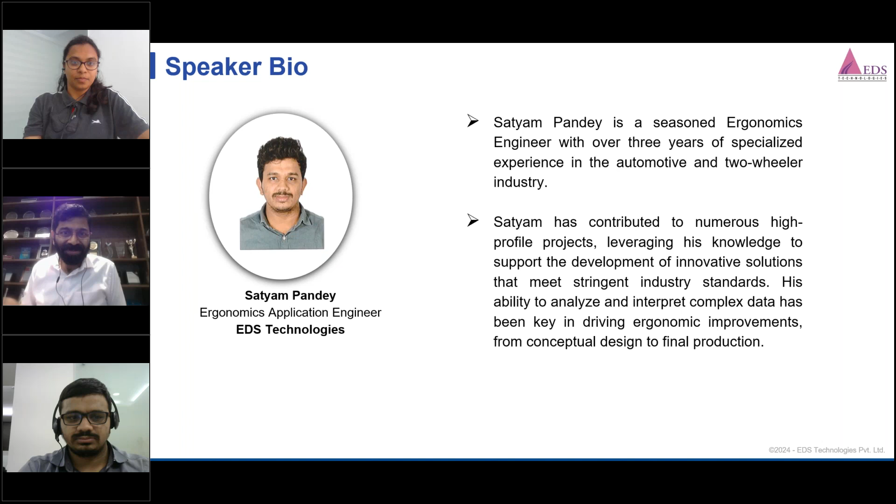Hello, good afternoon everyone, I'm Manasa. I've been with TVS Motors for the past 4.5 years. I started working as a designer for 2 years, and then moved into this role for the past few years. I took the entire responsibility of simulation engineering at TVS Motors with the help of RAMSIS software.

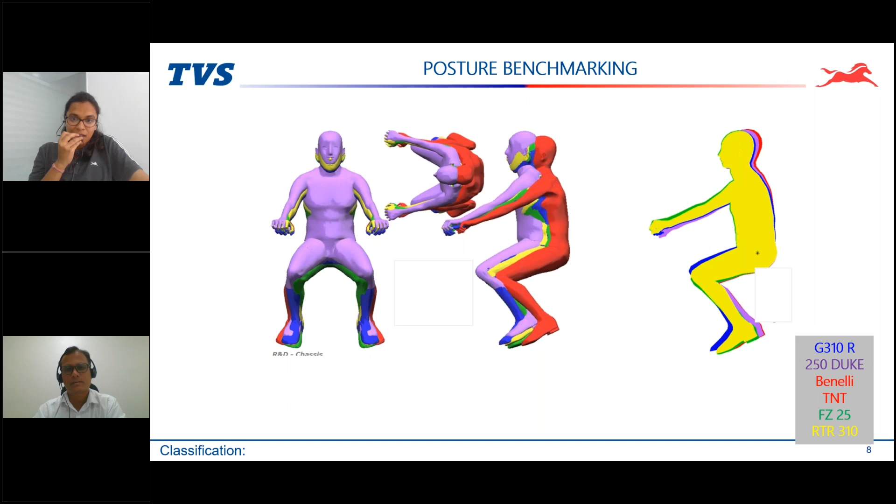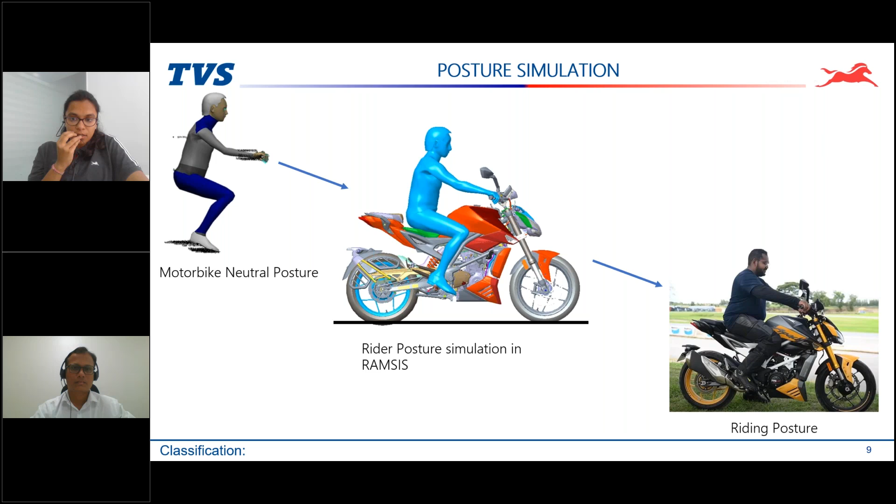This could be the most generic procedure for any posture simulation that we follow. Apart from normal neutral sitting postures a rider can perceive, there are other interactions when he or she is using the vehicle that are captured through RAMSIS, so discomfort can be avoided at a very virtual stage.

Here are some examples where interaction with passengers and the vehicle is important. Ingress and egress along with rider interaction is crucial for current market trends because of the use of pannier boxes, increasing need for long touring rides, and ease of accessing each touch point such as seat lock accessibility. We use RAMSIS in these situations to understand how the rider and pillion interact with the vehicle so minimal redesign can be done in physical stages.

As you can see on the extreme right side, we make sure that the rider and the pillion have a comfortable seating posture, virtually simulated using RAMSIS.

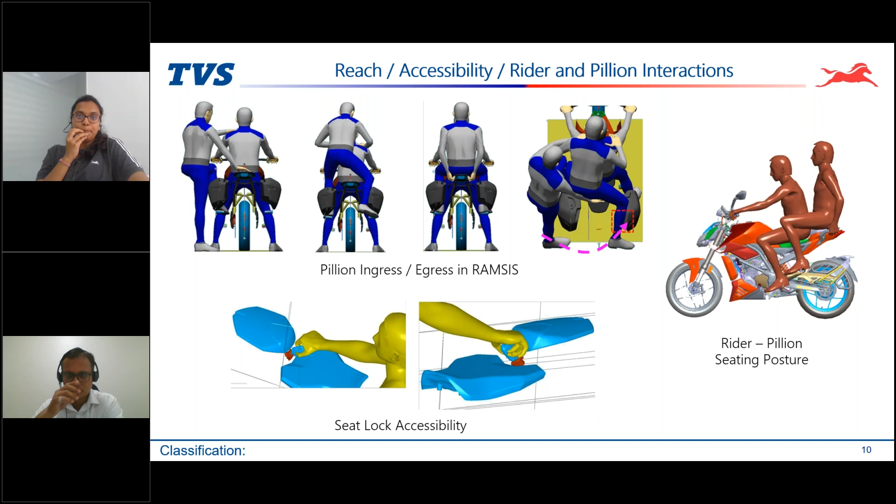On an overall scale, using virtual simulation softwares, we are able to perceive a very close reality to what we can achieve in the vehicle in physical stages, but at a very primitive stage. This can help us by giving very fast iterations along with an efficient design. We can go for a reduced number of prototypes instead of relying on each and every part for the prototype of the vehicle to come by, and consequently the cost and time would be saved. This is how TVS is trying to use RAMSIS for ergonomic simulations.

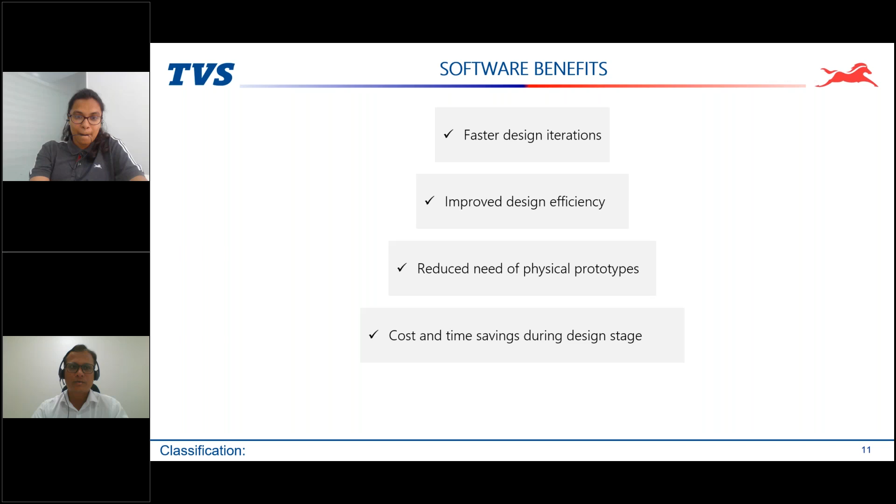Thank you, Manasa, for your time and a very good presentation on how RAMSIS is benefiting TVS Motors. From here onwards, we will start our technical presentation, the main content of today's webinar.

Here is a list of the content we'll go through. We'll start with RAMSIS for automotive in general, how RAMSIS is used in the two-wheeler industry, then see some typical analyses in RAMSIS like direct vision, reachability, mirror vision, and force analysis. This will be followed by a RAMSIS application demonstration, and lastly a Q&A session for whoever joined this webinar. So we'll start up front here.

We will see how RAMSIS evolved and the history behind it. Up until 1960, in very primitive days, there were two-dimensional scenarios and drawings. Mainly, vehicle ergonomics was taken care of by the SAE standards. These standards were important, and gave some guidelines for ergonomic assessments, but they were two-dimensional, and mostly based on American data from 1960, applied the same for everyone. But we know that anthropometry changes continent by continent, nation by nation.

Around 1990 and early 2000s, with the advent of many new three-dimensional CAD applications like IDEAS, CATIA, NX, and Creo, there was a global need felt to have ergonomics also done in three-dimensional way, and thereby RAMSIS evolved. The ergonomic quality of cars started drastically improving after that, with the advent of RAMSIS after 1990 or 2000. So it is definitely benefiting the overall ergonomic quality of cars.

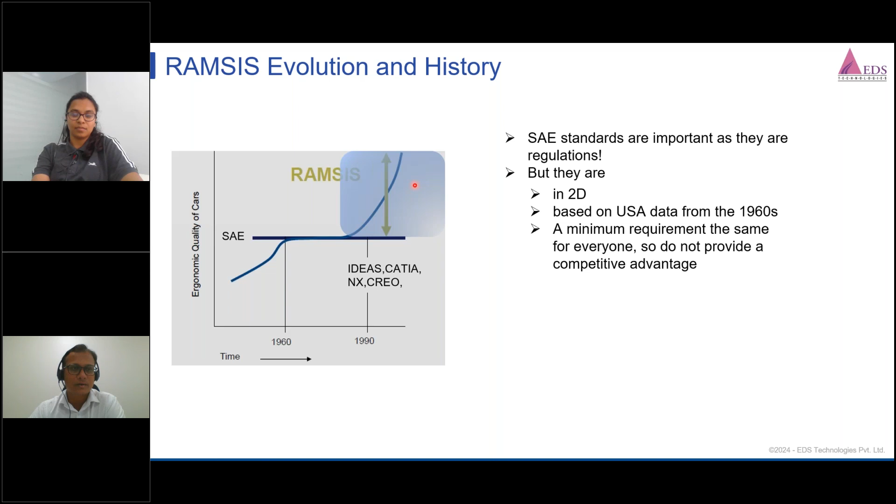So what is RAMSIS basically? If we abbreviate RAMSIS, it stands for Realistic Anthropometric Mathematical System of Interior Comfort Simulation. It's the most comprehensive ergonomic simulation software in the design of vehicles and aircraft.

It has a realistic representation of human beings available very early in the development process, so you don't wait for physical prototyping. This can shorten development cycles, save development cost and effort, and provide early evaluation of bike and driver appearances. It can also increase product quality and overall customer satisfaction, and it's a leading ergonomic simulation software worldwide, used by more than 70% of OEMs globally.

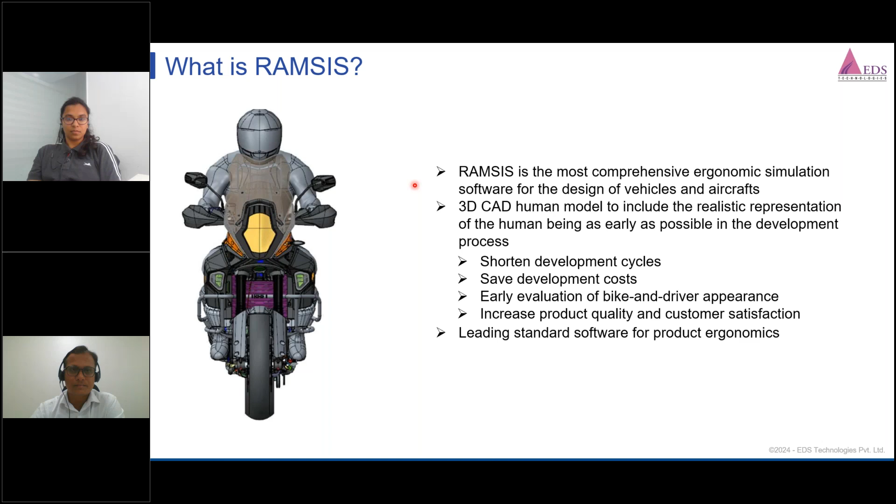So you can choose any future database for your future cars and programs. Apart from these available databases, we can also achieve custom-made body sizes and body proportions with the help of the RAMSIS Body Builder module, available in RAMSIS. RAMSIS mannequins have a realistic and credible appearance, scanned to very high accuracies against realistic populations.

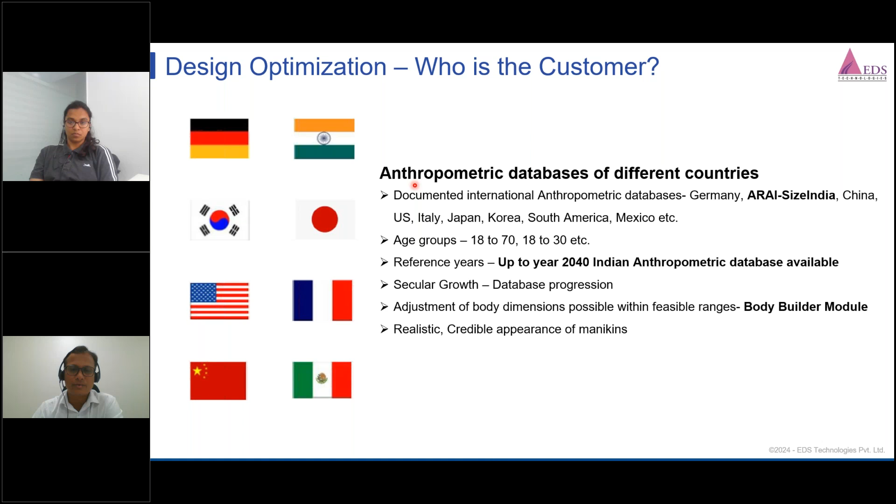So apart from the driver and the databases, you can choose how many drivers you want to declare and study in your vehicle context, and how many pillions and riders you want to study. You can literally choose as many as you want and make the vehicle geometries and controls suitable to those selected driver populations.

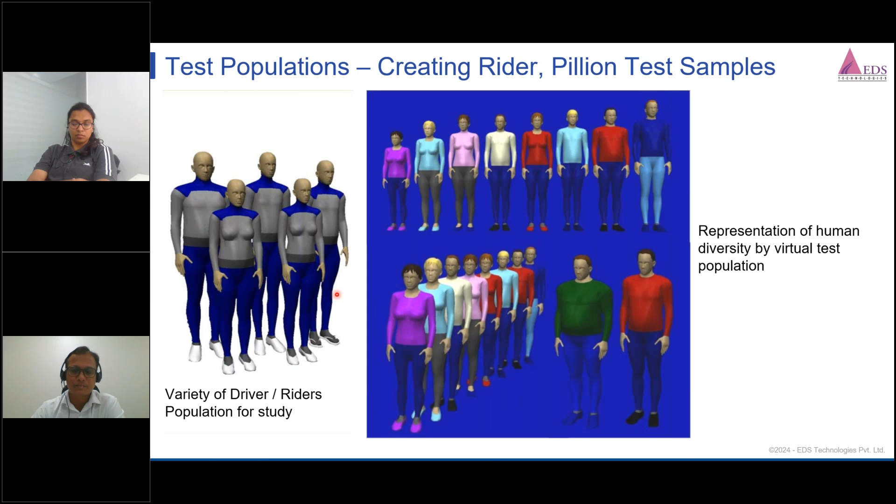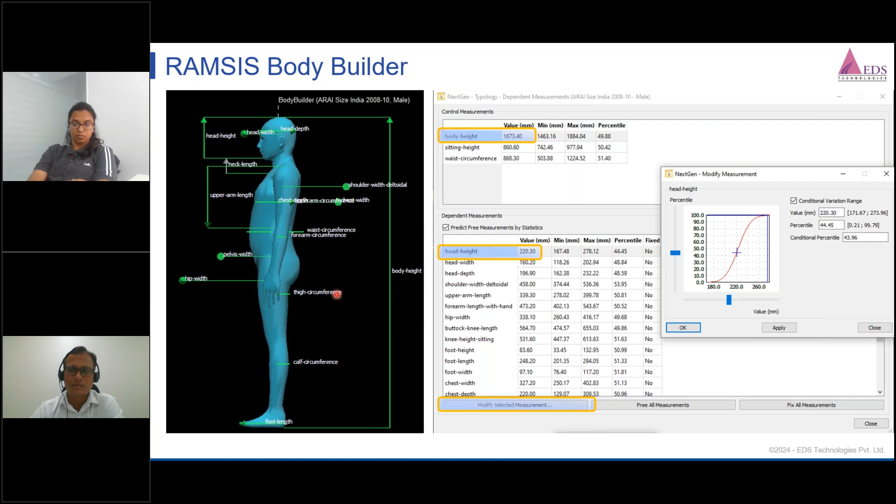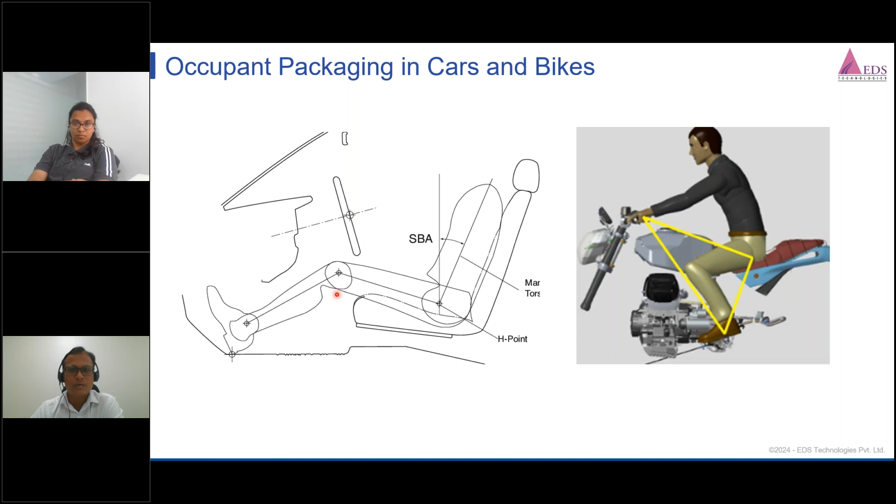So first we have to start by defining the markets, choosing the anthropometric databases correctly, and choosing the posture models. For defining the target, as I said, we have all continents and all demographics data available built inside. We have different age groups, reference years, reference progressions, and we can choose from size, corpulence, adjustments, and proportions. Apart from that, we have the RAMSIS posture model, which is a distinguishing feature of RAMSIS, providing ready to use posture models for different industries.

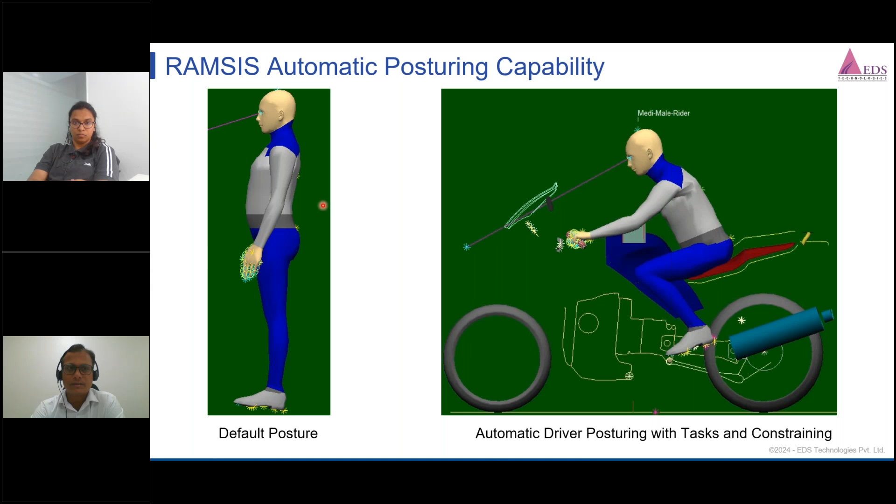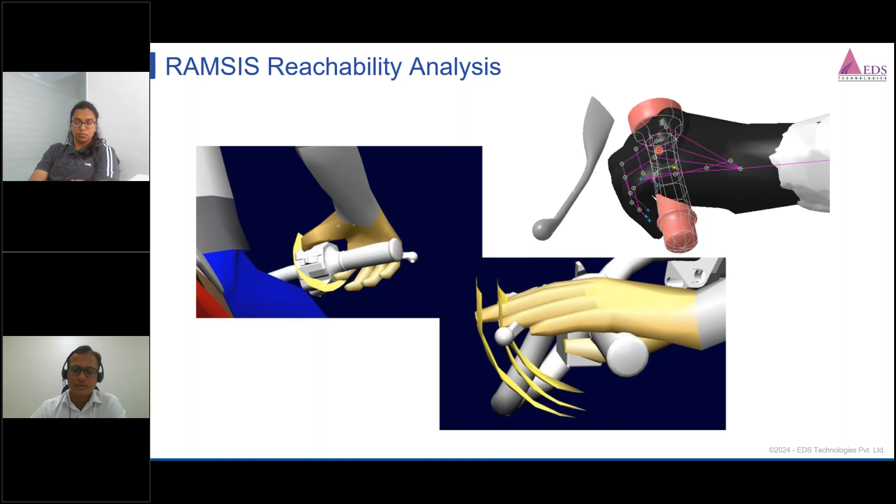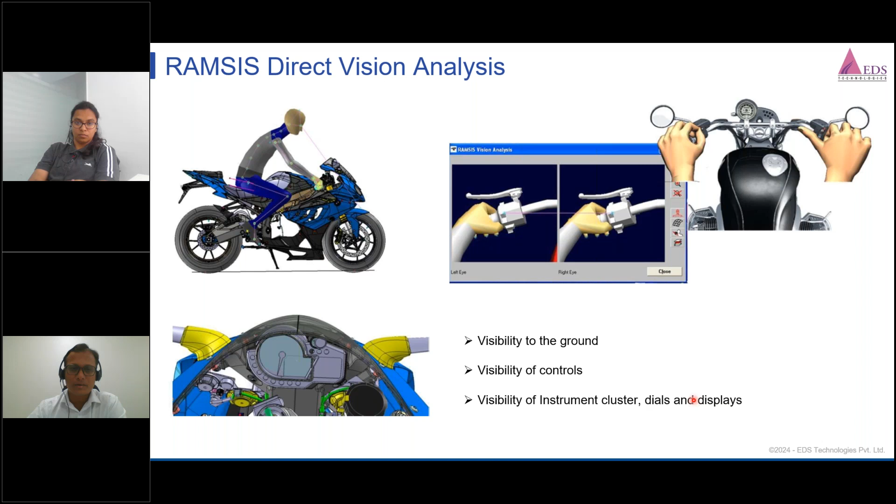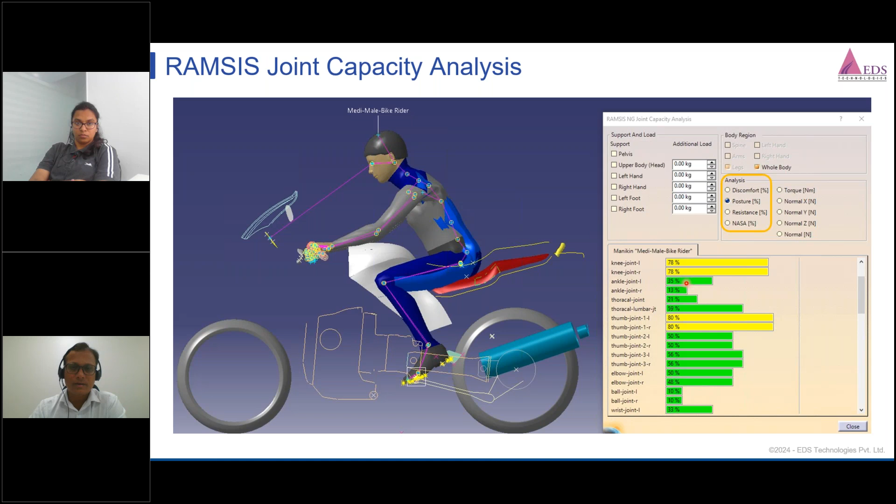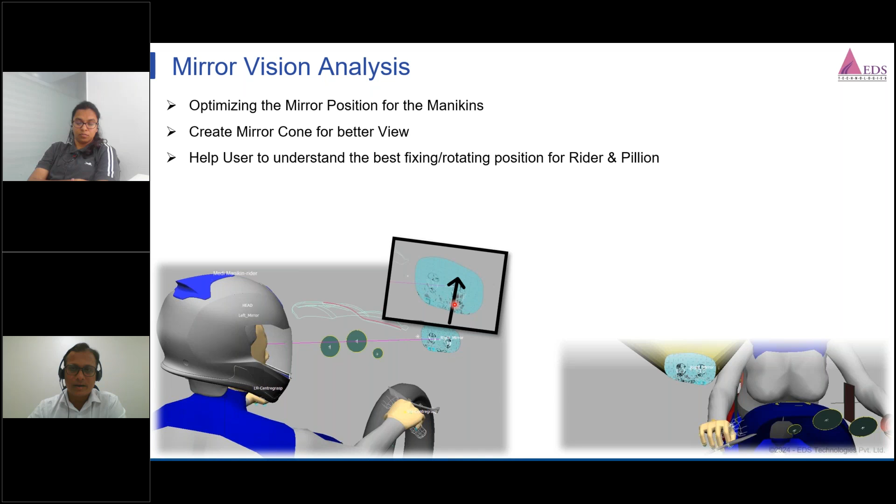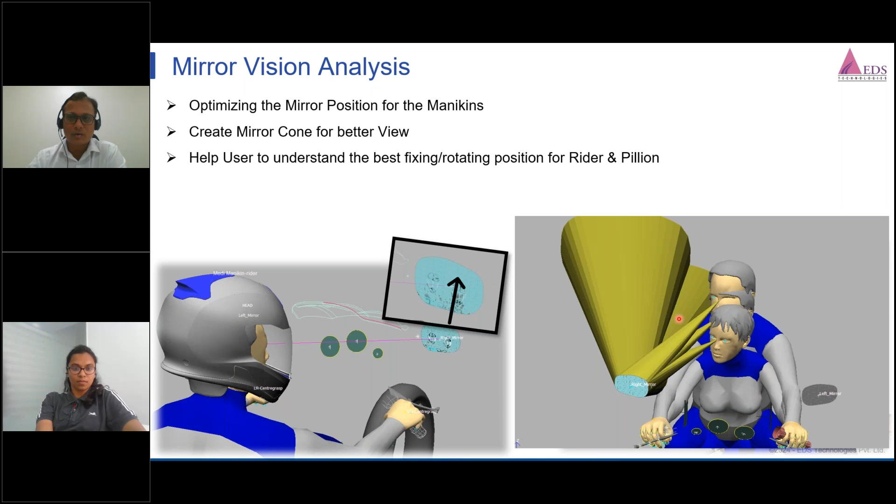And these are the mirror cones that the smallest woman is able to see. So these are the typical cones that can be exported out of RAMSIS and taken to the native CAD applications for the assessments. Not only the smallest woman, but all the population inside the seated position, three mannequins now. So all this can be taken out, and you can see what is the rear view vision for all these three populated mannequins.

And that is a very good value to know very early in the design, so that if the force values are too high or too low, we can make design corrections in our controls design, or maybe in the clutch geometry, or maybe we can increase the leverages, thereby reducing the forces. All those assessments we can do quite easily here.

So it gives three levels of forces, like maximum force, which the mannequin uses sometimes, like pressing the kick lever, which we don't really use now, but that is a one-time activity. So it needs maximum force, and it can give you that force as well. Tolerable force is for intermittent actions or controls he operates in the seated position, how much force will be required for that operation. So that tolerable amount of force can also be known.

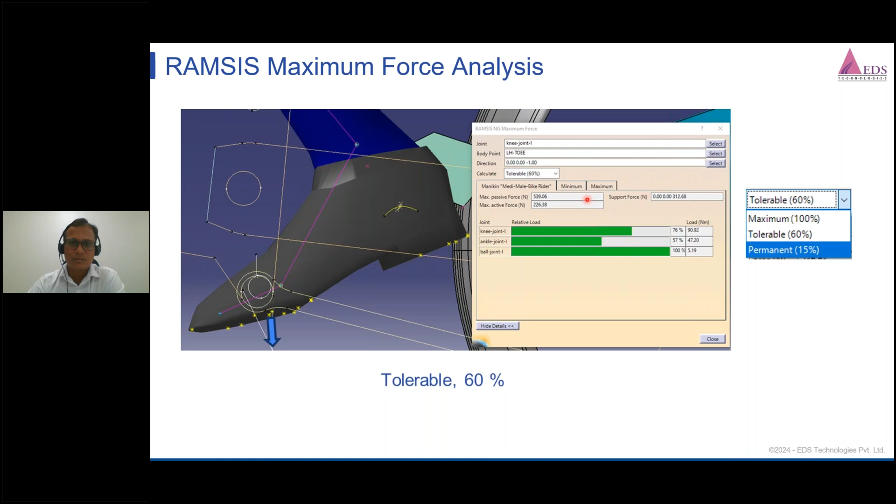And permanent force is something like holding this handlebar or holding the steering wheel. So handle and steering wheel are also among the important controls. So for holding them, how much force will be needed, because we hold the steering wheel and handles all the time. So we have to estimate, or we should know, what force is really required for that. So even that force is available to know from here. So from this, you can really know these force values also.

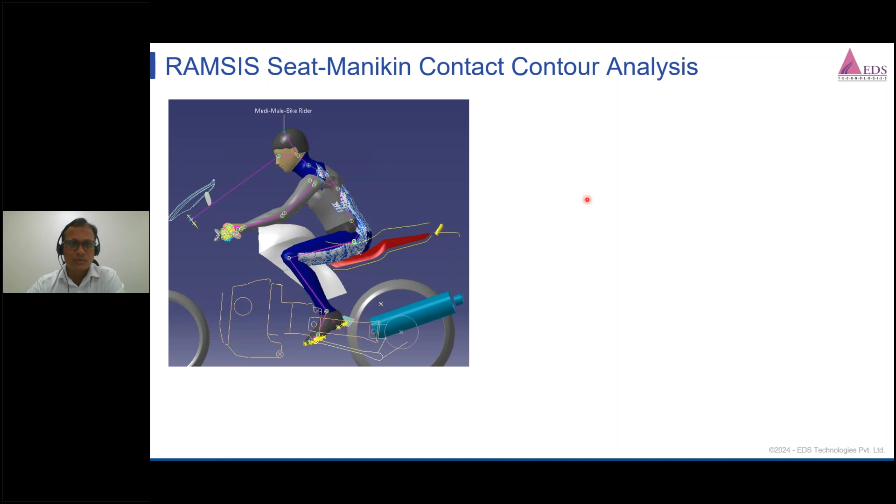One of the mannequins is made to sit on the seat location. He has occupied the position, he has occupied himself in the seating geometry here, and then we can literally extract his body contour out and further make use of it. So I will just show you. So this is a typical contour of the seated mannequin that can be exported out of RAMSIS. So if we just see, this is the typical contour.

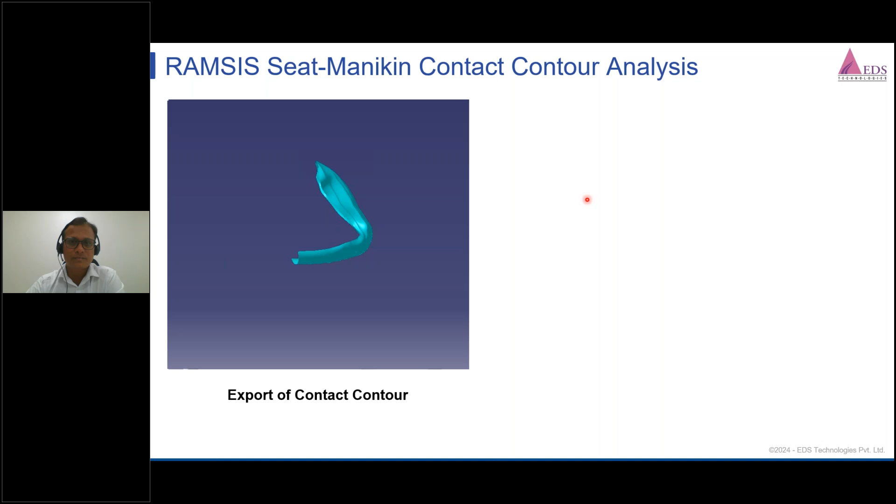Now, if we export this contour out of RAMSIS, we can place it in our native CAD applications, and we can study how far it has an intrusion with the seat, and whether it is going too close to the metal geometries, pipings and tubing, etc. beneath. That also can be known, or many other assessments can be done out of it.

If any OEM decides to provide a different type of stiffness at the rear and the front, even those can be decided, deciding the length of the less stiff area and the more stiff area. That also can be one of the studies that can be done with the help of this contact contour. And its geometrical output can be derived, so that's a good part of it.

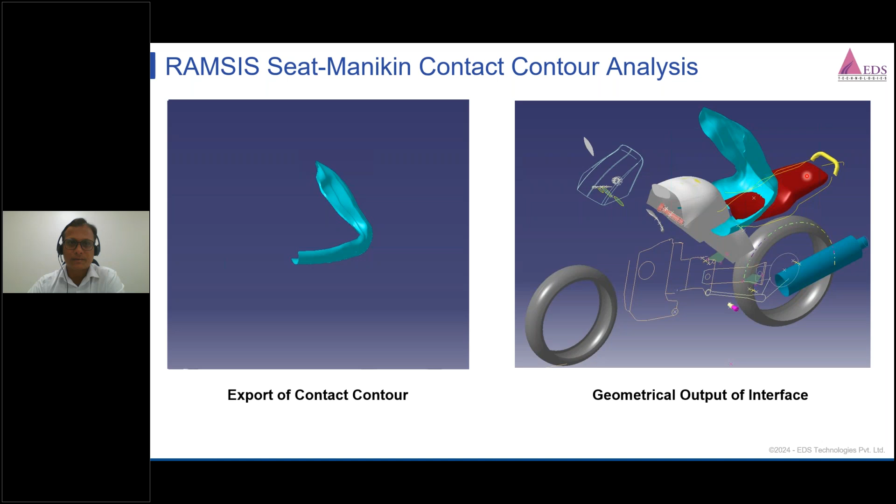Ground reachability is another tedious topic, especially in the biking industry, where the saddle height is of really great importance. It tells a lot about whether the shortest person can reach the ground comfortably or not. This is especially crucial because in traffic scenarios and tight city conditions, we have to have this ensured, because a too high saddle position will really make the short person uncomfortable to properly

So we can study these scenarios in RAMSIS. Otherwise, we need actual human test populations of those sizes, and then we can only have those studies quite late in the program when we have actual prototypes done. And there is very little chance of any design rectifications, because by that time a lot of prototyping, soft tooling and tool ordering has been started. So any change takes a lot of cost, time, and effort.

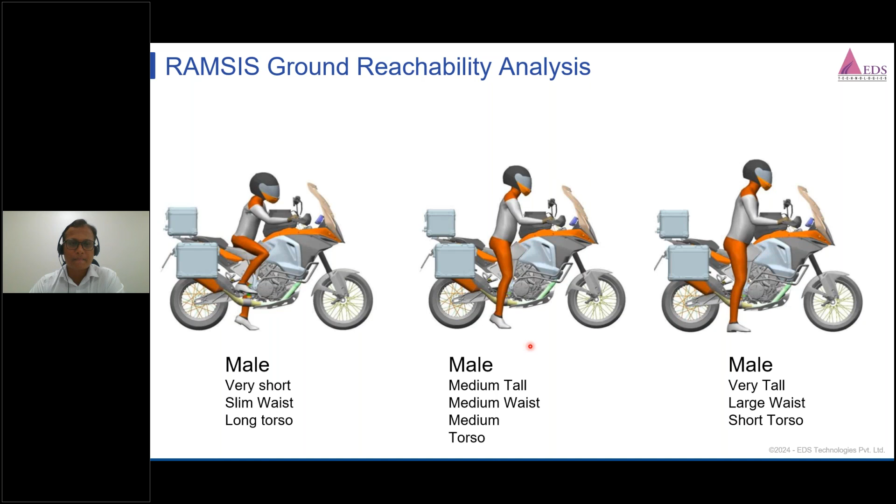How can RAMSIS benefit you for the product design? It can also give you some hints about how we can improve our design conditions. So the color graph here is not any stress condition, like stress features or stress values, but it represents three types of mannequins, just colored with different colors for the sake of understanding. With these three populations, you can place them in the seated position and study the vehicle interfaces that have direct contact with the body dimensions or body proportions.

So any physical contact with the vehicle geometry is actually a kind of vibration path towards the mannequin. Thereby, the mechanical vibrations travel to the mannequin and make them irritable and uncomfortable, so that he can't drive for a longer time. So such contact should be known very early to the ergonomics engineer, so that the vehicle geometries can be properly optimized, and such unwanted scenarios do not come very late in the vehicle launch programs.

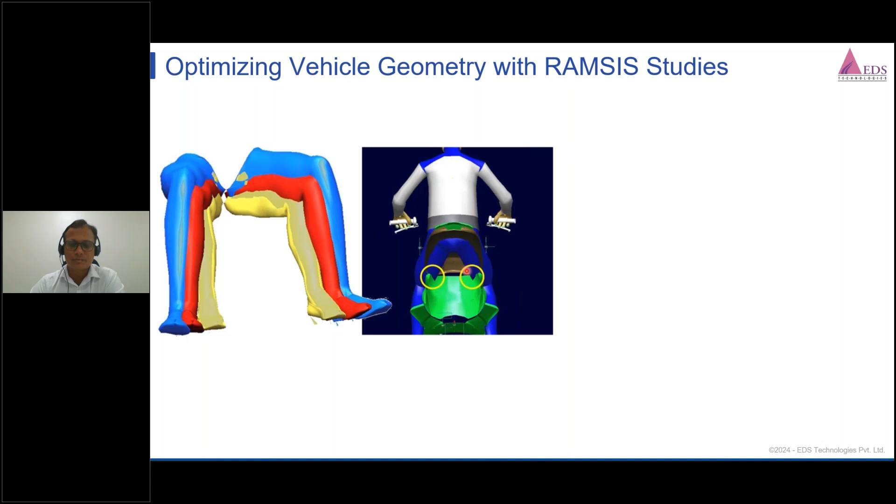Another scenario is the transmission casing. This can't be known unless we position the digital mannequins or the physical mannequins. But the digital way gives a good chance to know such interferences, which may otherwise be a hard contact between the vehicle geometry and the human. Then the design condition here will be to give some design changes, or shifting the position or something. Those judgments and decisions can be very confidently made out of these studies.

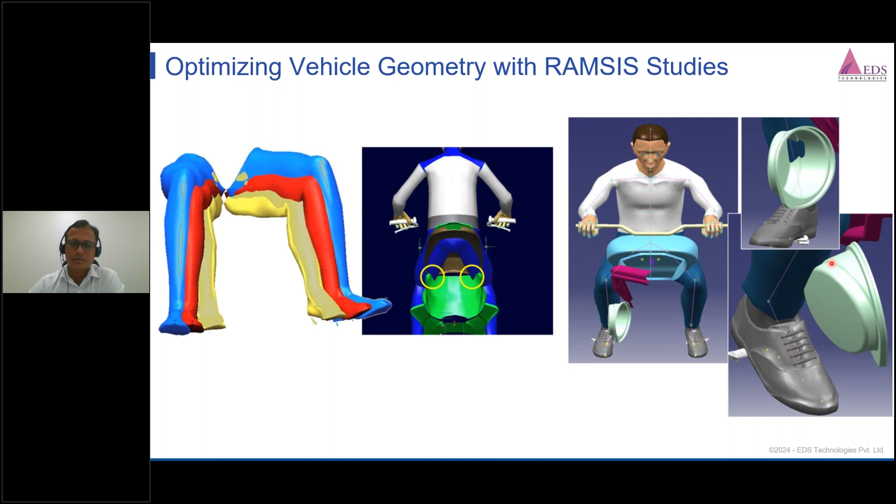Another good topic is that in the biking industry, we always ride with different add-ons, clothes and apparels, trousers, etc. So RAMSIS provides the possibility to have those add-ons on top of the digital mannequins and study the different activities with those add-ons on the mannequin. For example, the first mannequin I have chosen is wearing a jacket, so street wear, with boots and trousers. And then I will make certain studies.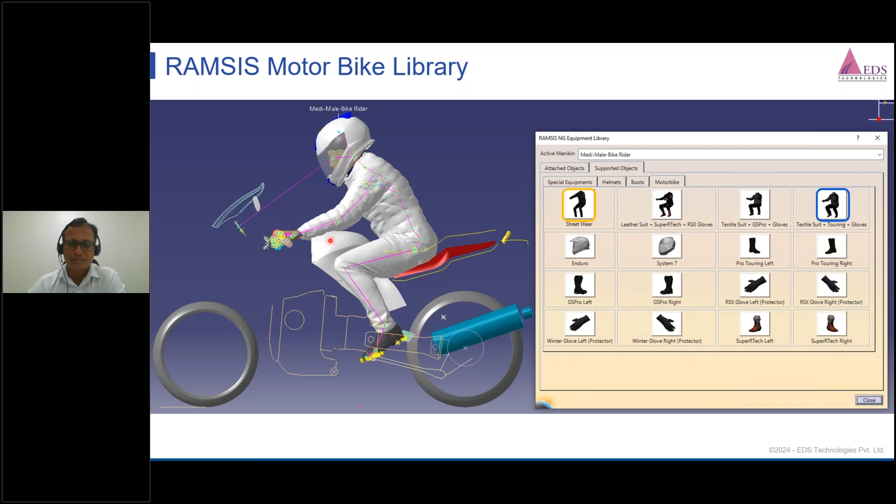But if I have to make another kind of add-on, like a textile suit and touring and gloves, with just a click of a button I can change the mannequin to the desired apparels. Then the mannequins take those apparels and add-ons, and we can do our studies accordingly.

What will happen if I make the clutch or the footrest position slightly forward, slightly backward, slightly up or slightly down? What will be the delta effect of all these changes? We can study it right in RAMSIS by knowing the joint capacity, what we saw in the previous slides, and choose the most optimum ergonomic triangle for our use that will eventually be comfortable for those test populations.

For example, the Indian mannequins or Indian population. So this is very crucial in the studies, because here we saw a lot of problems where there are some concerns that either the footrest is quite low or quite high, or the handle position is quite forward or quite backward or quite high in the position.

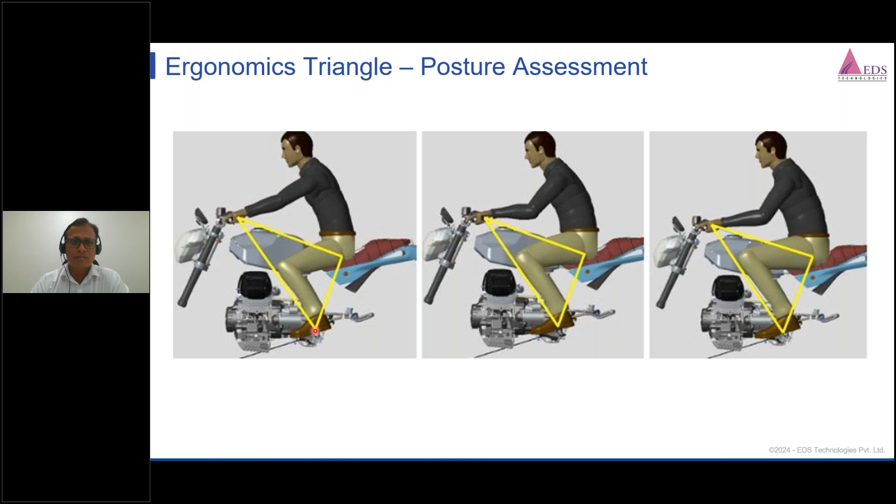I think with that, that was possibly the last slide from my side. I think we have one more, yeah. So the condition here is that with the footrest, we can try different iterations, like this is slightly inboard, this is slightly outboard, and we can study both conditions and see how comfortable the posture is at this position. So all these delta studies can be done; this is a typical ergonomic study that we can do.

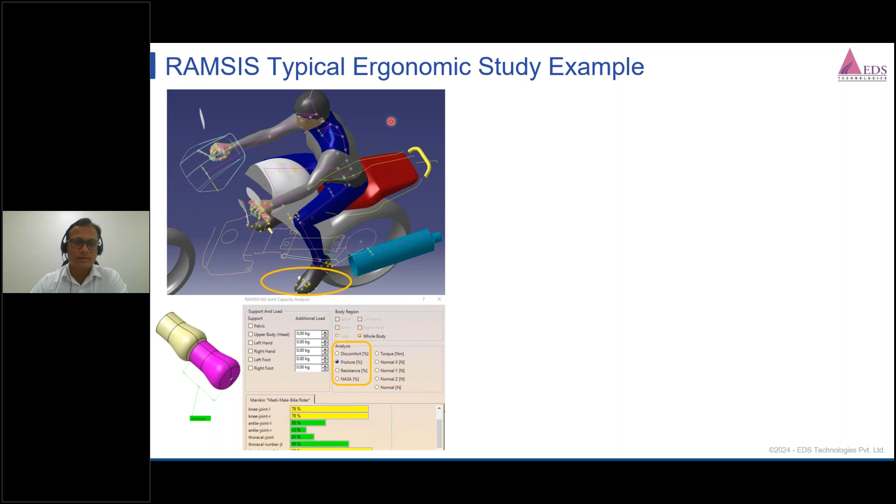Again, the force analysis: what I see here, you can readily see the force values that can typically be applied at the ball of foot level here. So these give ready-made force values that the mannequin can exert at this point of location. I think that was it.

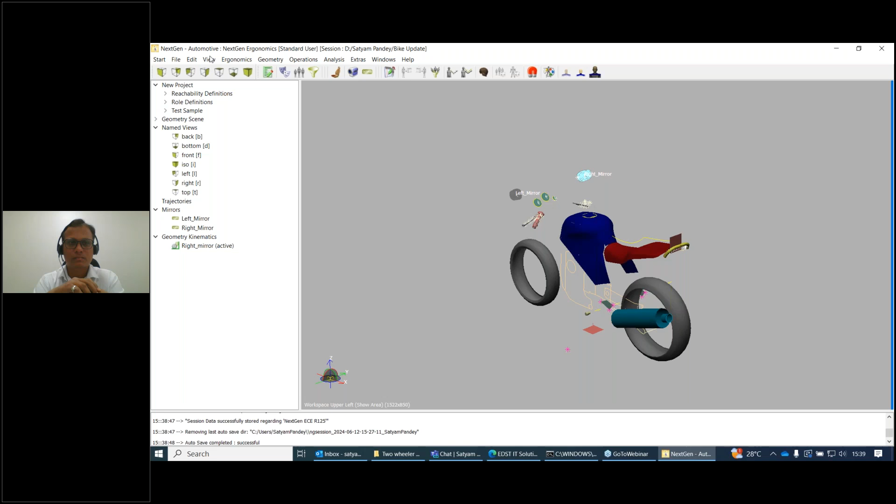So I'll just quickly go to the applications. So we have RAMSIS NextGen in standalone. For example, we have here a 3D two-wheeler geometry of the bike, and this is what the typical UI of RAMSIS NextGen looks like. At the start we have different aspects like ergonomics, project managers and bodybuilders, where we do different analyses. How to create the mannequin and how to iterate the process is what I'm going to showcase in these small demonstrations.

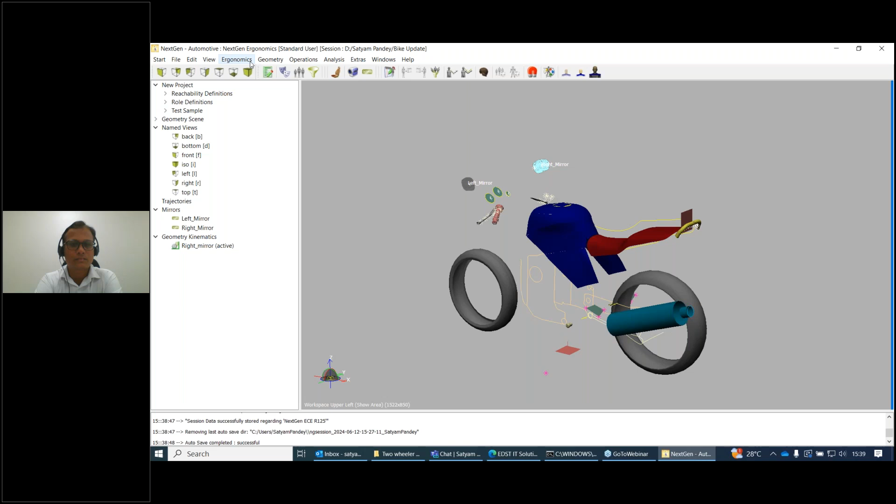So first, if somebody wants to create populations or test sample filters, we have something called the project manager, where we define the role definitions and the naming, for example, rider or pillion. Then we define the range of motion; different ranges of motion lead to different movements of the body. Then we have different H-points. Typically we select the average H-points, where we select the mannequin's neutral posture and average sitting position.

And then we have different adjustments. We have the age-dependent vision. In the slide you have seen that we have age groups. So if you are creating an age group or an old mannequin, you can change the age-dependent vision, which gives a more realistic scenario of how the mannequin's vision is affected with respect to age.

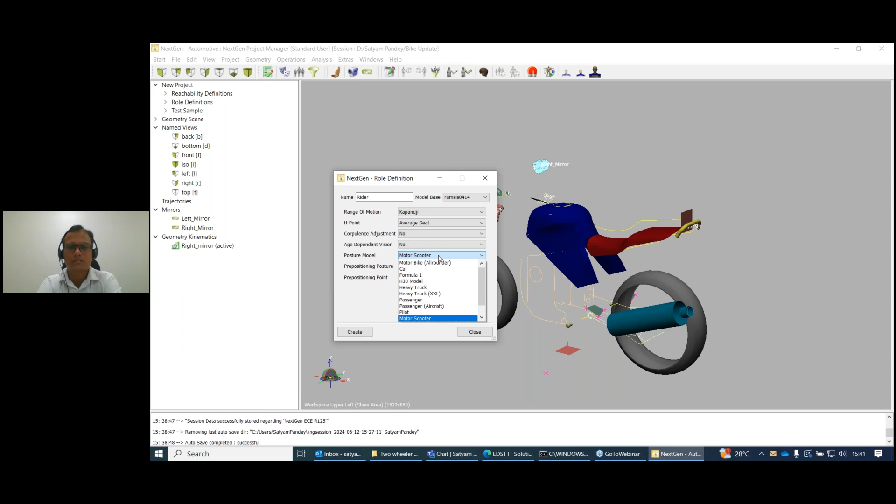And for the posture models, for the bike we have the motorbike all-rounder, and we have the motor scooter models. We select these in order to validate the ergonomic studies for the rider or for the pillion. Then we select the pre-positioning points for the simulations; for example, the pre-positioning point would be your H-point, or sometimes a G hip center. You define that point, then click on create, and it will be created.

So for example, you can see here the role definitions. I have one for pillion and one for rider. Once you have created the role definitions, you can create the mannequin. In the role definitions you are basically defining what exactly you are going to create, for example, whether you are creating for the rider or for the pillion.

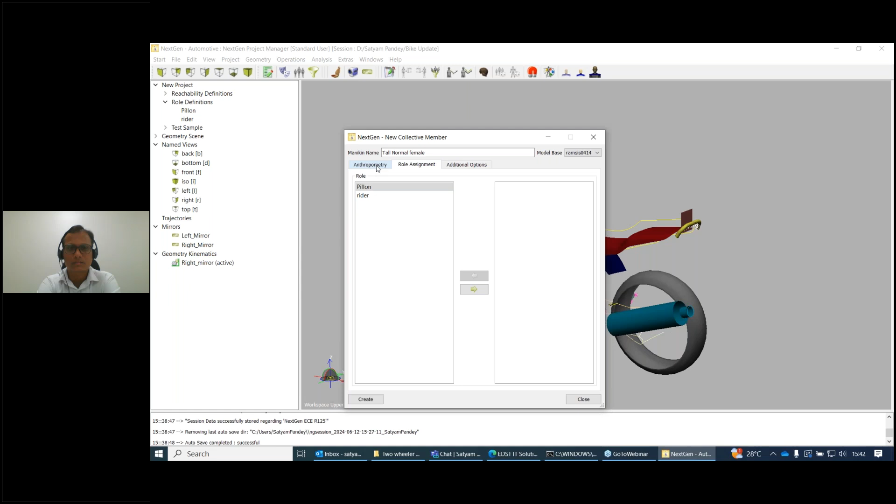So you can see here we have both riders and pillions. And then here, for example, if I want to create a small mannequin or medium mannequin, I can go for the sizes which are available here. You can see the populations, you can see the age groups. I can select any of these, and the nation data, which nation data I have to select. So for India, we have two data sets: India and India ARAI size.

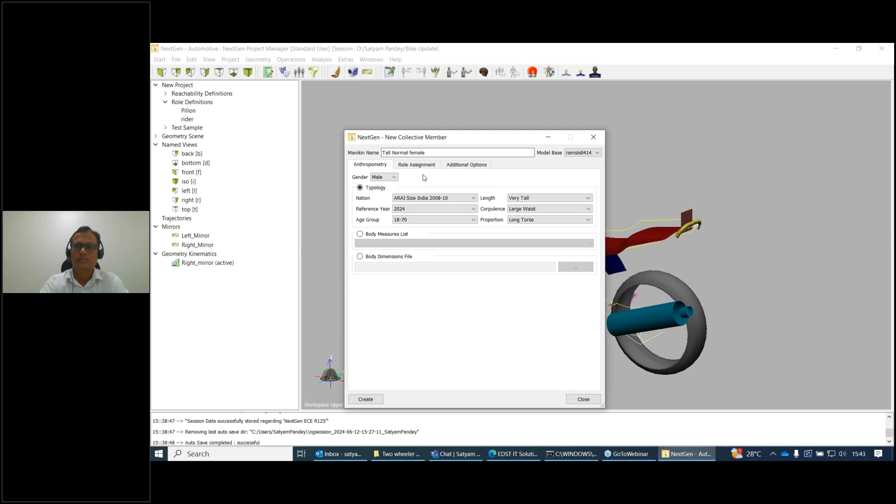And we can also select the gender you want, male, female, or child, if you want to perform those studies. And on top of that, you can also select the body measurements. Now suppose you have taken some actual person data, then you can import it inside RAMSIS by using the PML. And then you can click on create, and the mannequin will be created.

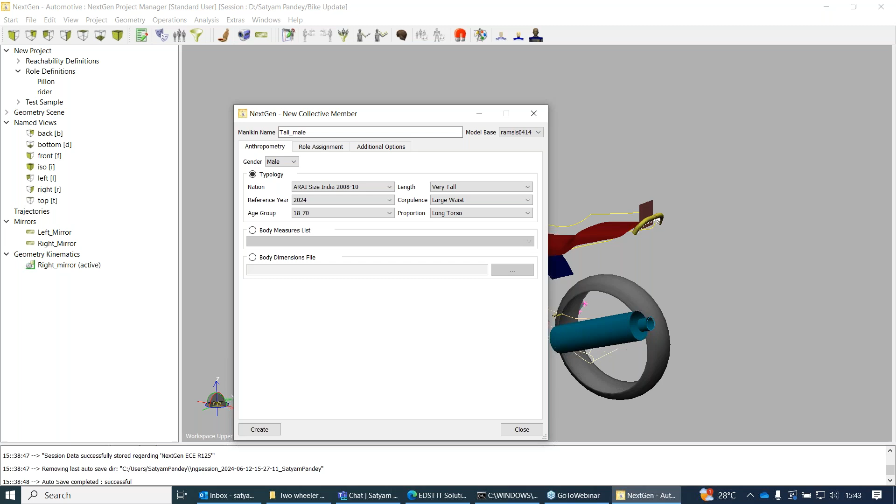For example, I'll create one mannequin instantly, so I can show you how exactly it looks here. I'll create one tall male. So basically, your short male will be a 5th percentile, medium male will be a 50th percentile, and tall male will be a 95th percentile. So, male. I select the reference year, for example, 2024, and I'll just create tall male. So you can see this mannequin has been created here, along with the textures, along with the shoes.

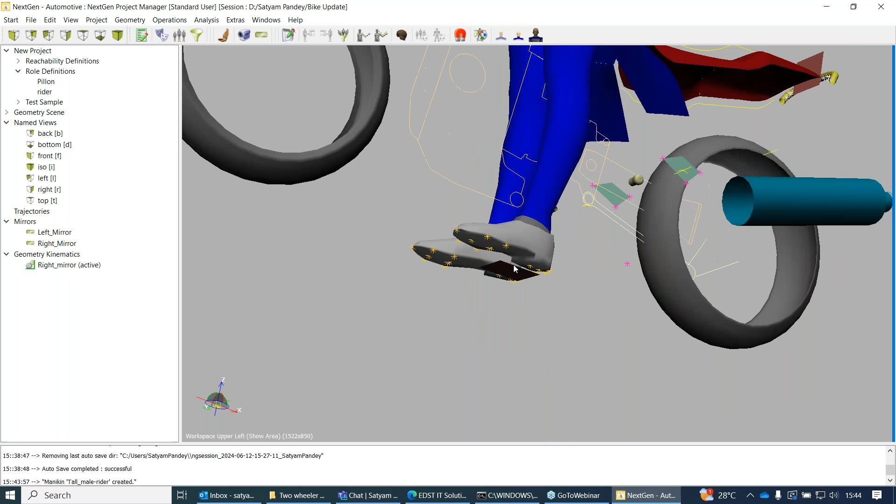Now we definitely have to add the constraints. Before we add the constraints, we have something called skin points here. You can see some of the skin points added already. And if you want, you can create skin points anywhere on the body in order to perform any kind of study. Once you've created the skin points, we have something called ergonomics, and inside that we have operations. Inside the operations we have define restrictions, where you start defining the restriction with respect to the environment object and the mannequin components, that is the points.

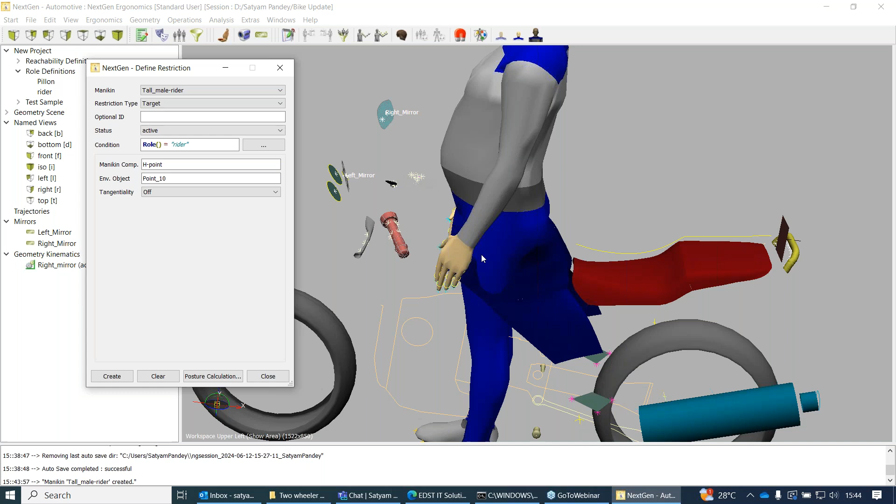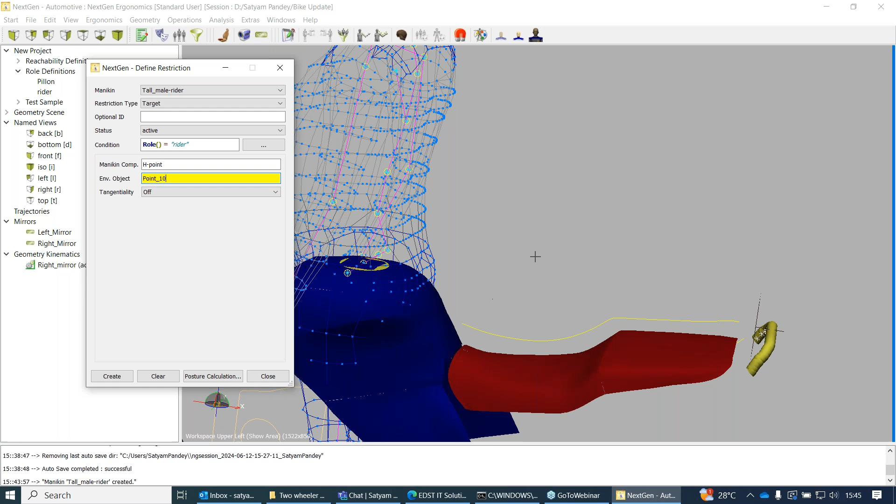For example, I can select the mannequin H-points, and then I can place them on the seat. Here I'll select the point which I've already created, and then I can simply click create, and the restriction will be created for the mannequin. You can see the restriction has been created, and if I want to see these restrictions, I can see them in the restrictions overview. You can also see this mapping has been created.

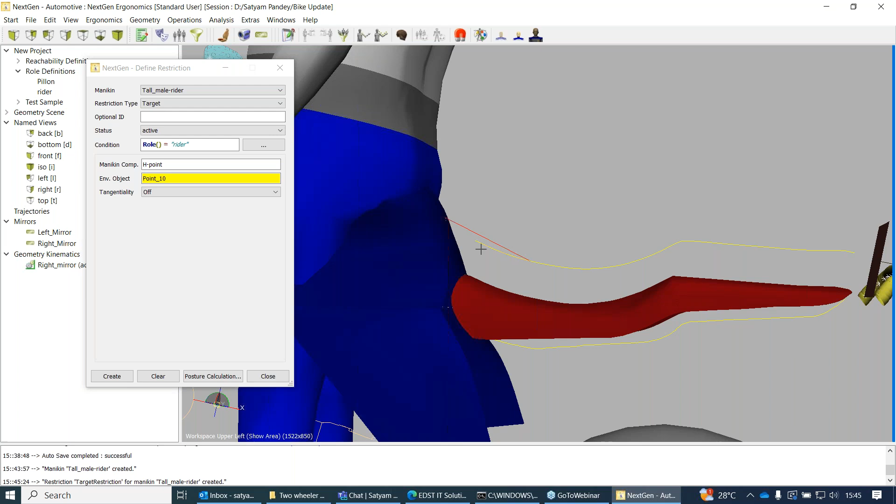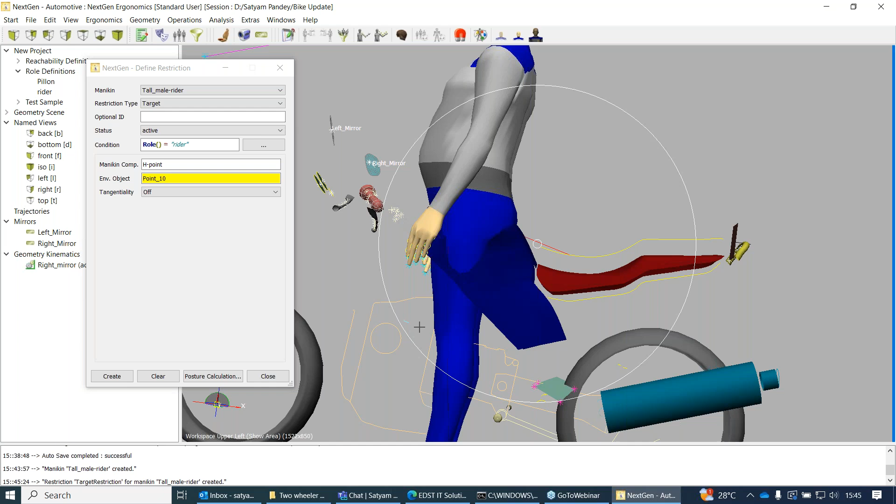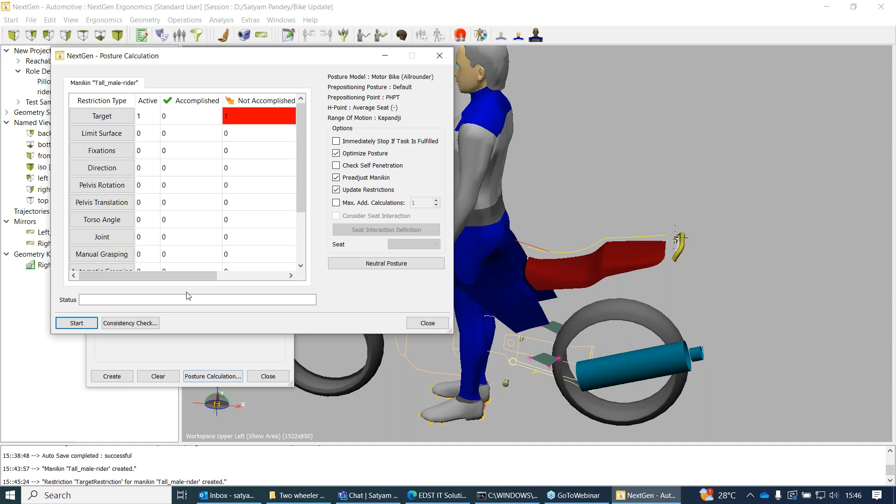You can see these red points going from the H-point to the seating points, and then I can check whether the seating points are correct or not. So I can simply run the posture calculation to make it sit. And then I can define the rest of the points, for example, handle points and the points on the foot pegs, and then simply run the posture calculation. Here I made my mannequin sit on the H-points, so I can see how the touching is happening, how the interaction is going on.

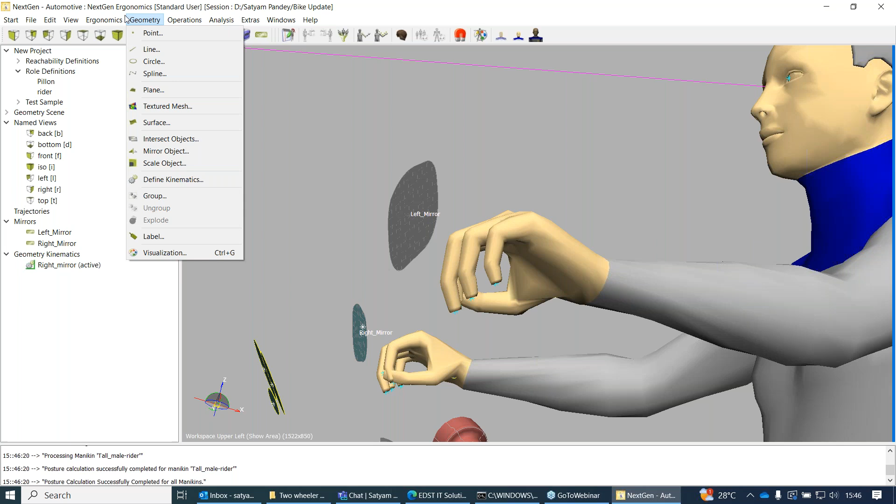And then I can also create points, for example, on the palm. In order to create those points, we have something called manikin, and in the mannequin we have skin points. These are the inactive skin points. For example, if I click one of the points, this is in inactive status, then I can name this point as left grasping, change the activity to the active state, set the individual naming also, and then close this. Now I can see the point is activated.

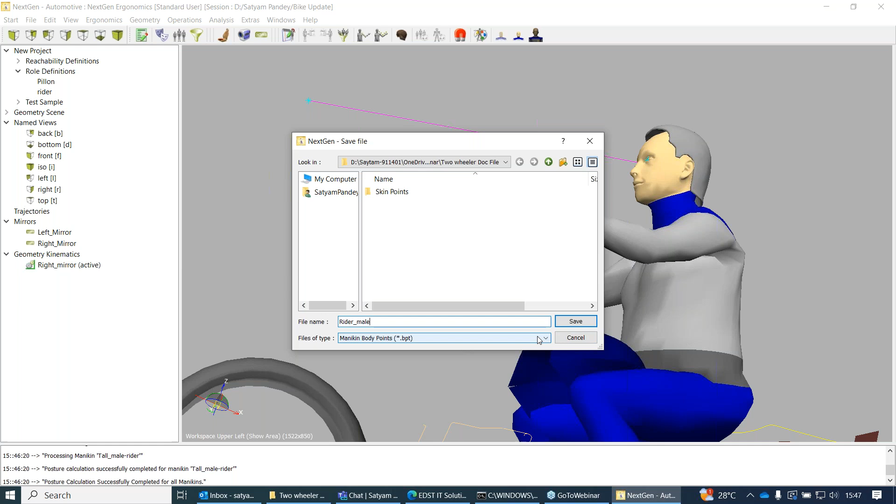So once the points get activated, you can save them either way. We have some saving extensions, something called save as, and we have something called BPT, that is manikin body points, and you can save it with any naming you would like to give. For example, rider body points, rider male body points. I can save this, and then once I created all the points, I can recall it. So I'll just recall the points which I have created for my session, for example.

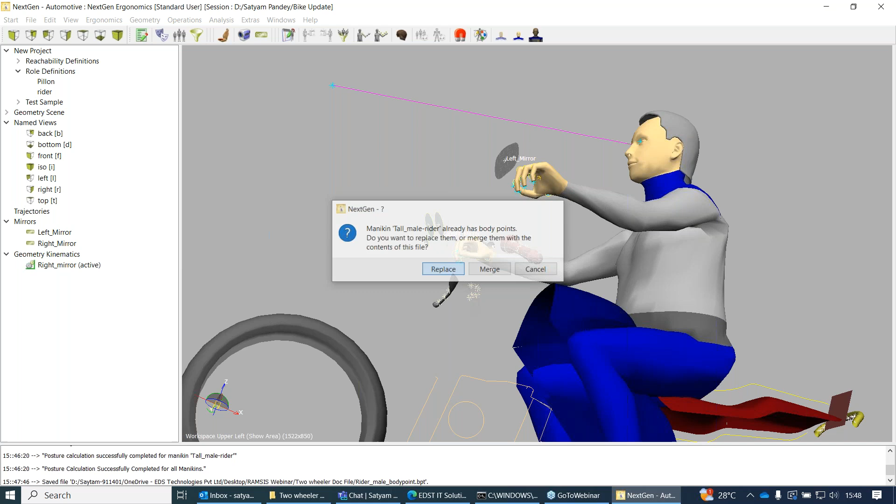So I have something called open, and then I'll go into the skin point and I'll upload it. So now once I open it, it is asking me there are already points there. You want to merge it or replace it? So no, I want to replace with the new points, the points which I have created. And then you see these points have already been added on my skin points. The skin points are updated, and then similarly you can save this as a task file.

So for example, whatever the operations you are defining here for the mannequins, whatever the tasks you are defining on the operations, you can see I've only given the edge points. So likewise you can define all the tasks here for different subgroups. For example, surface fixations, and the types of grasping you want to make. So those are the constraints you can add here, and then you can save it as something called a task file. So I'll just quickly show you.

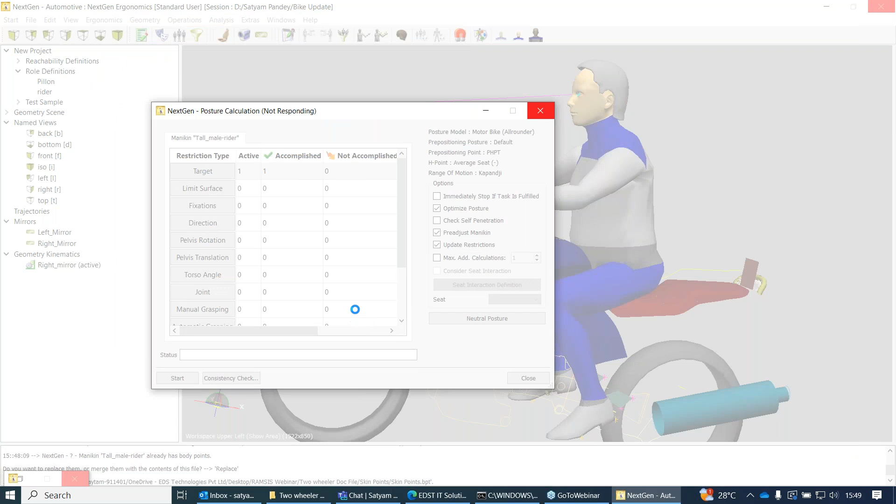Yeah, just a moment. So once you save that file, then you can recall it, and then you can simply run the iterations for all the mannequins at once, in a single go. So you don't have to place each and every mannequin individually.

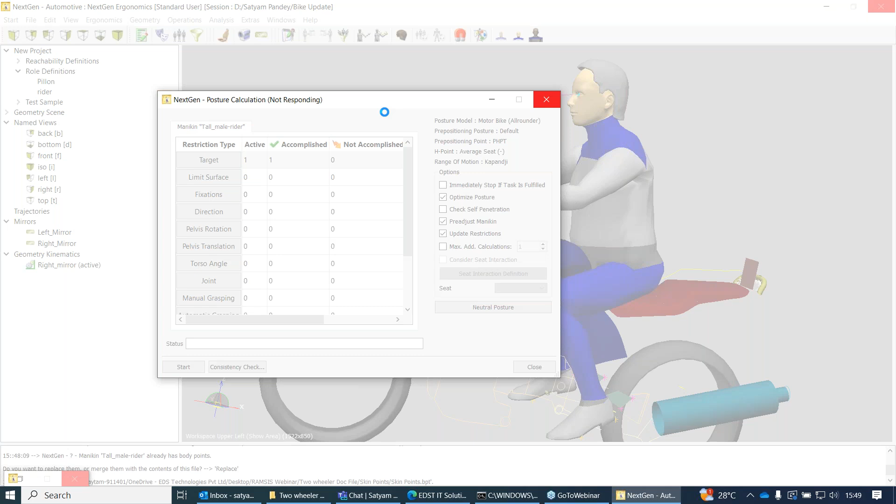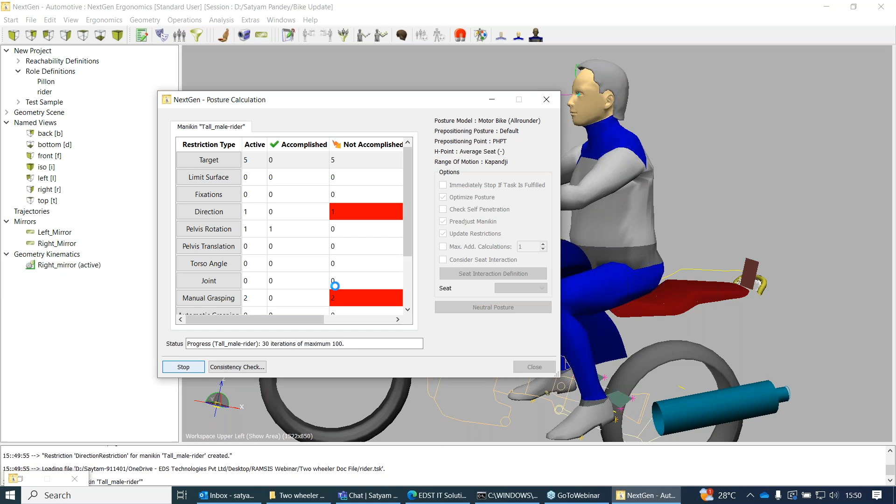Yeah. So here, I saved the skin points. Similarly, I have something called the mannequin task. So here you can see this task is there. Similarly, if I go back, I can see my rider task here, and I can simply open it, and then I can simply start running this mannequin. So you can see all these points are not accomplished when I run these restrictions. Now it gets accomplished, and now it's sitting in the best optimized position for himself.

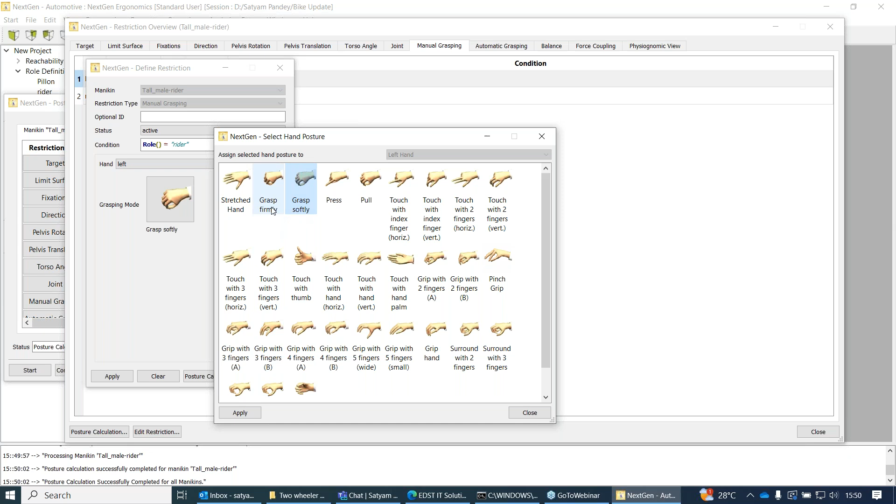So this is how, with a simple click of a button, you can run all the analysis, and then you can see here the distance. If any of the distance is not zero, it means the mannequin is failing to complete that restriction. So what changes you can make, you can see your grasping, how the grasping is. For example, if you want to edit the grasping, you can click on edit restrictions, and we have the library called grasp firmly also. So instead of softly, you can add firmly. Later on, you can create your own posture and save it as a posture file for each and every individual scenario.

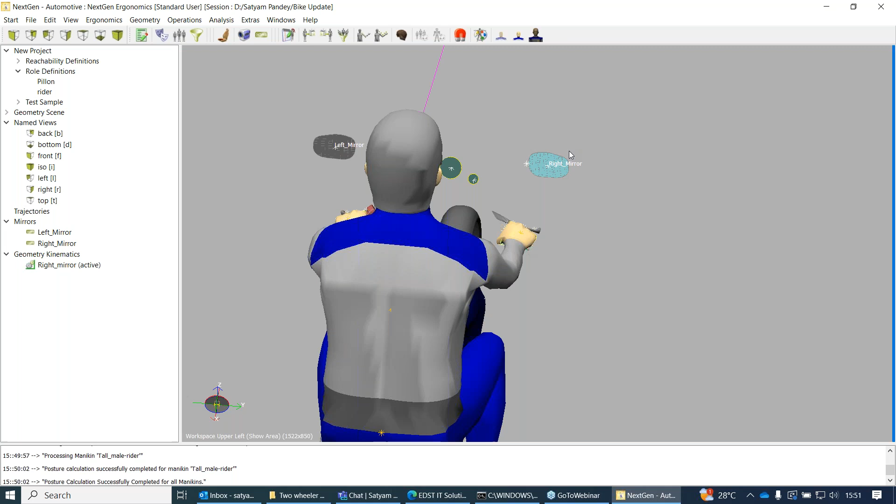Then, for example, after that we have seen the mirror studies. So for example, my driver is looking over the road view. If I want to make any movement with respect to my mirror view analysis or any kind of analysis, I can simply go to the operations, and we have something called move eye, and in a single button I can select the points on the center, and then I can simply check this box on and set to the posture.

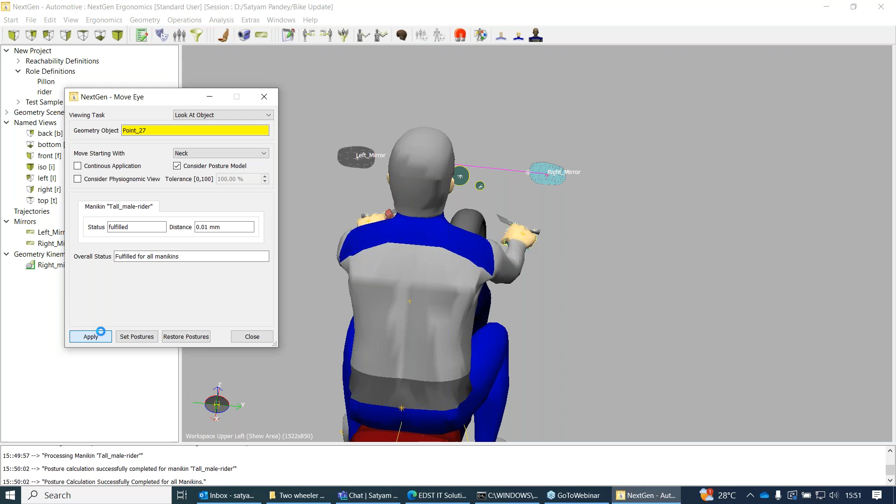So you can see now the manikin is looking at the mirror, but you can see it can face issues if I turn on the physiognomic view, where it says the limit of the eye restrictions. But nonetheless, I want to make my head movements also. So you can see now the head is also moving and looking towards the right mirror.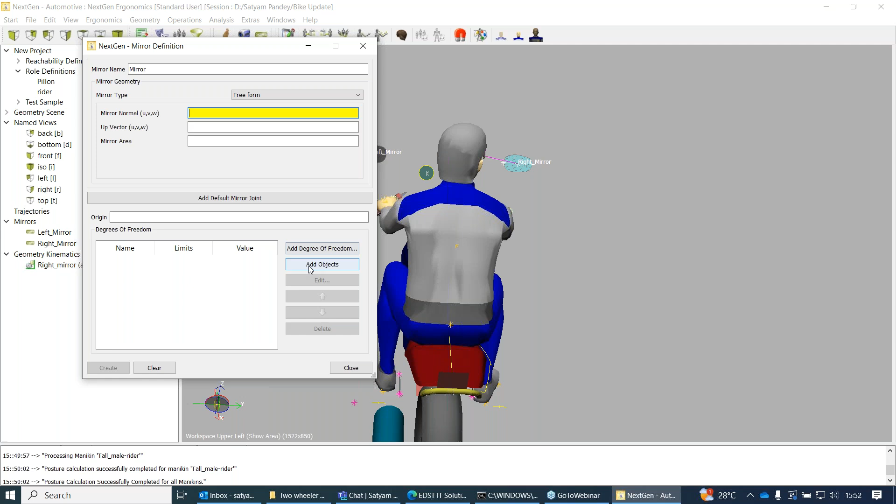So we have something called mirror definition, camera definition. So if there is a mirror you want to create, we have something called free forms. If you have the type of mirror, rectangle, planar, spherical, and if it's different, you can select it as a free form. You can select the directions. You can select the object of the rotations, and then you can add the values here.

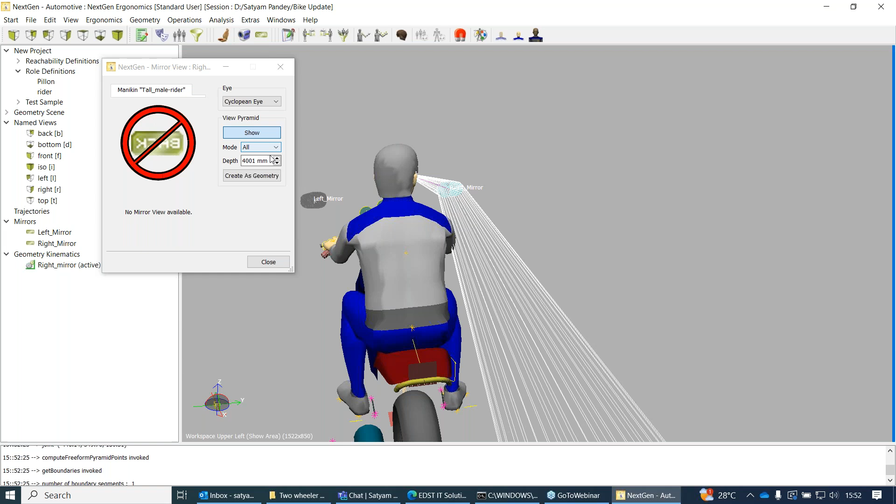For example, I've already created, so let's simply jump into the mirror view to see exactly how it looks like. We have something called analysis, and in the analysis we have the right mirror. You can see this is the pyramid which is formed, and what depth we want to make, like 4000 mm or 5000 mm, and then we can see this mirror. We can rotate the mirror.

Whatever we want to keep at the optimal angle, we can also adjust to set it, and then we can create as geometry if we want to see the visions.

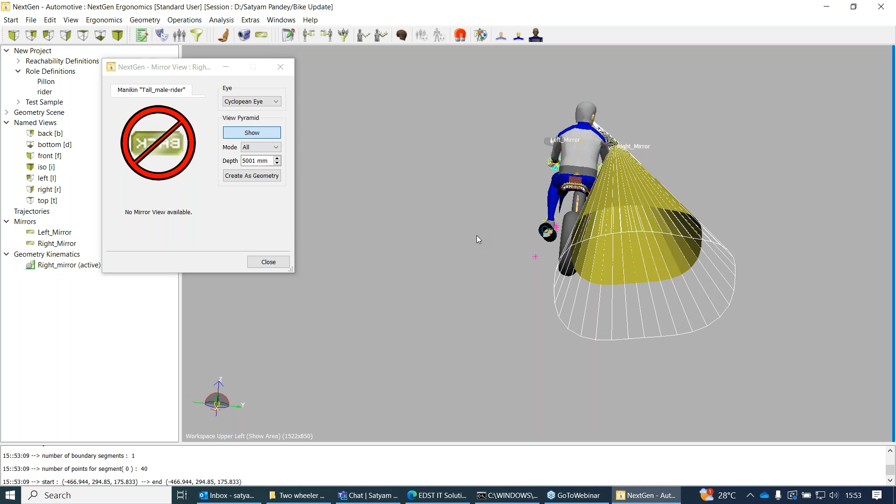If we have a limit of 4000 mm of depth, or if we have more than that, for example 5000 mm of depth, we want to check whether the mirror is covering that area or not. So these are the properties you'll more or less be receiving from your team, to analyze these factors for the mannequin and how this reflection is happening inside the mirror.

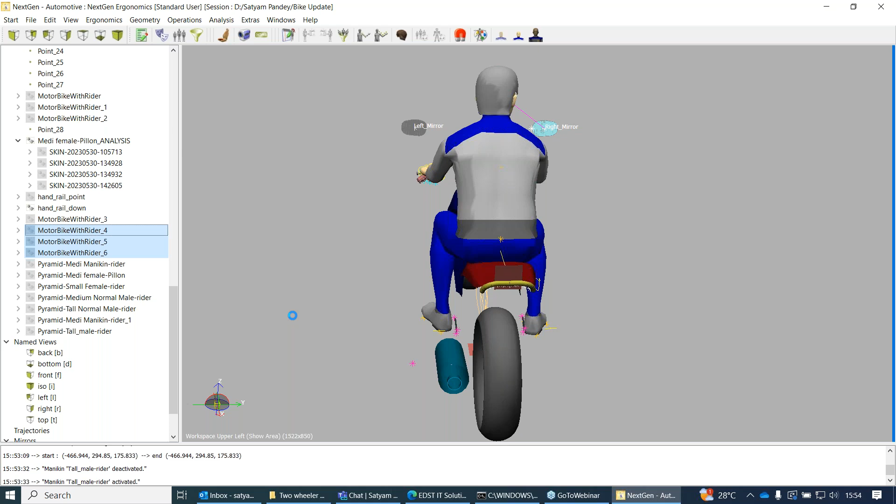For example, if I'm turning on my mannequin, and if I turn this off here, and turn off a couple of the traffic scenario, for example... So you can see here some of the traffic scenario, and then I can go into the visions.

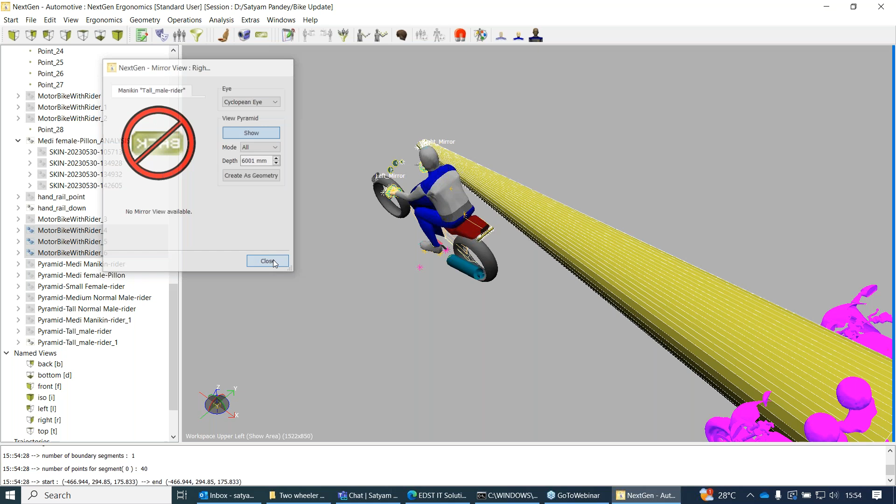I can see the cones, whether the cones are covering this area or not. You can see some of the cones, if I extend this to 6000 and create it as a cone, you can see some of the area I've been covering on the mannequin on the mirror. So how well I can optimize, I can also take this reflection inside the mirror as well. So this is one example of the mirror analysis.

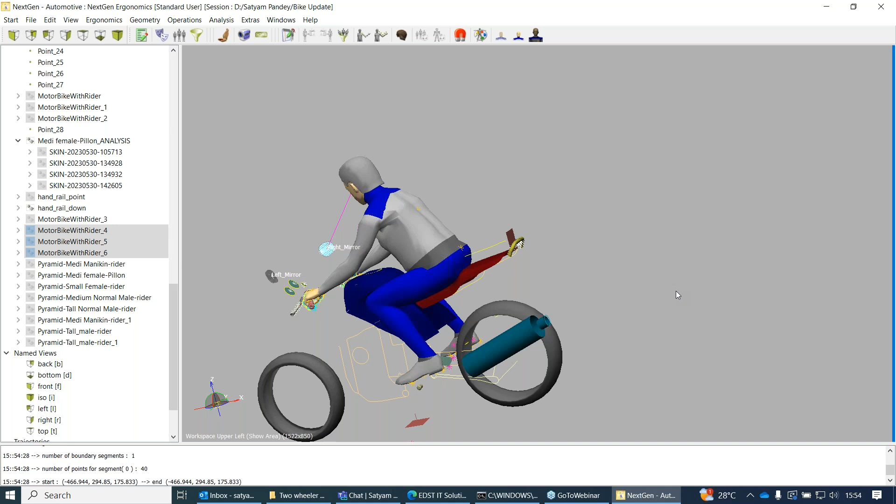Then we want to check how well the posture has been optimized. For example, in order to check those things, we have something called joint capacity analysis to do that.

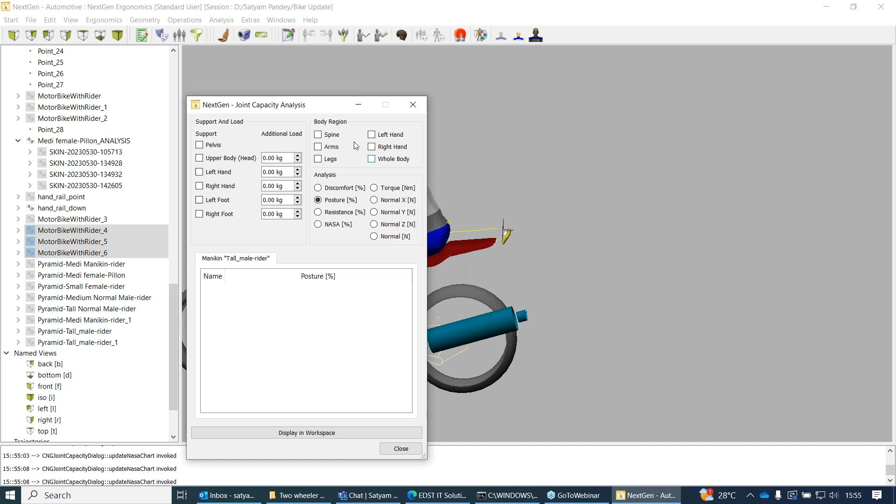So I'll go into the joint capacity analysis here, and then I can see the discomfort and posture. I want to do this for the postures, and we have the body regions like legs, spine, arms, left hand, right hand, or the whole body. So I can either choose an individual region or select the whole.

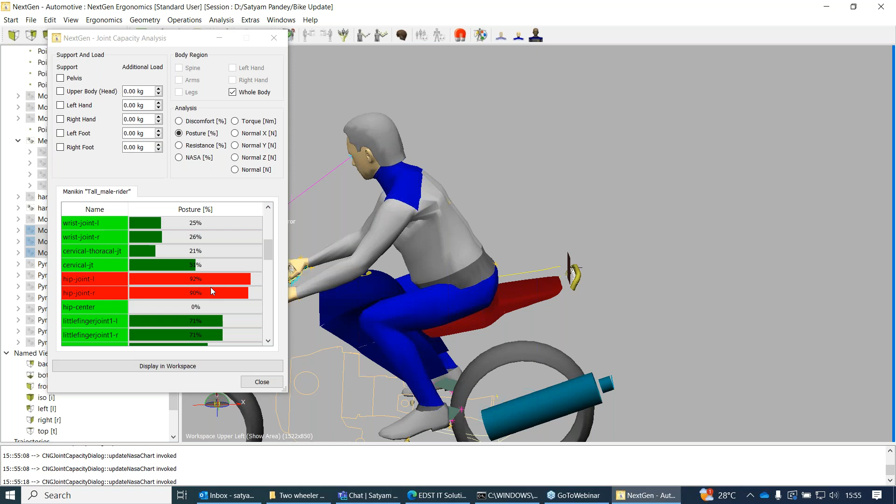You can see whatever is in the green zone is the best optimized position, these are good postures. The yellow one is acceptable because there's some degree of freedom present for your joints, but the red zone, you can see, is not acceptable. You have to optimize the hip, right and left joints. So certainly you have to optimize those things in order to give better degree of freedom and good posture for your mannequin.

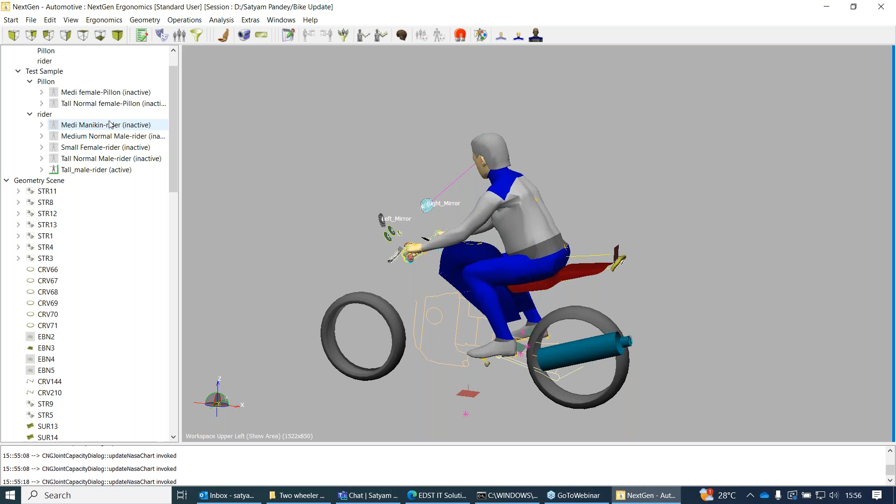So with this, I think our demonstration is complete for the mannequin. Also, we can add different aspects, for example different mannequin behaviors which I have created here. I can just activate them to check, if my mannequin is putting on a helmet, how this scenario looks like for her.

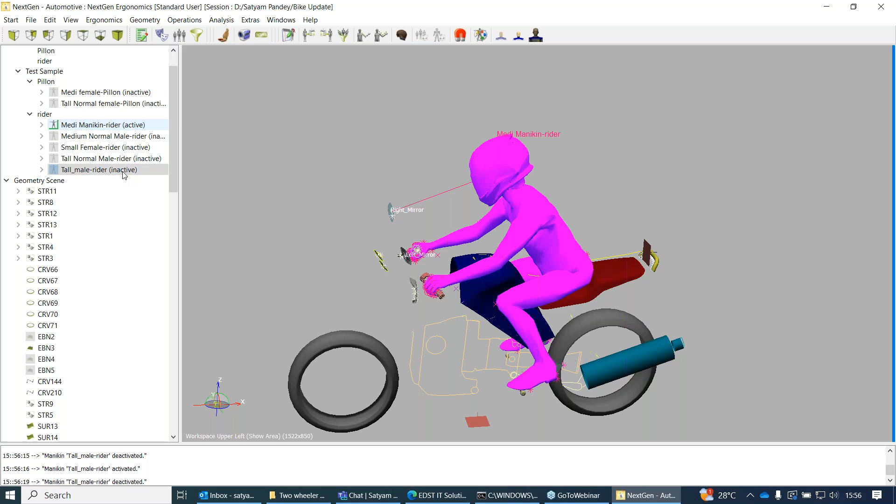For example, yeah, so that you can also see here. You can check the mannequin visions with respect to the helmet, with and without it. For example, if I have a different mannequin, a medium mannequin, I want to see what he is seeing in his focus area. So we have something called internal view, and you can see what he is able to see, like the cyclopean eye, the combination of both eyes, and the left and right positions of the angles, how exactly it is able to be.

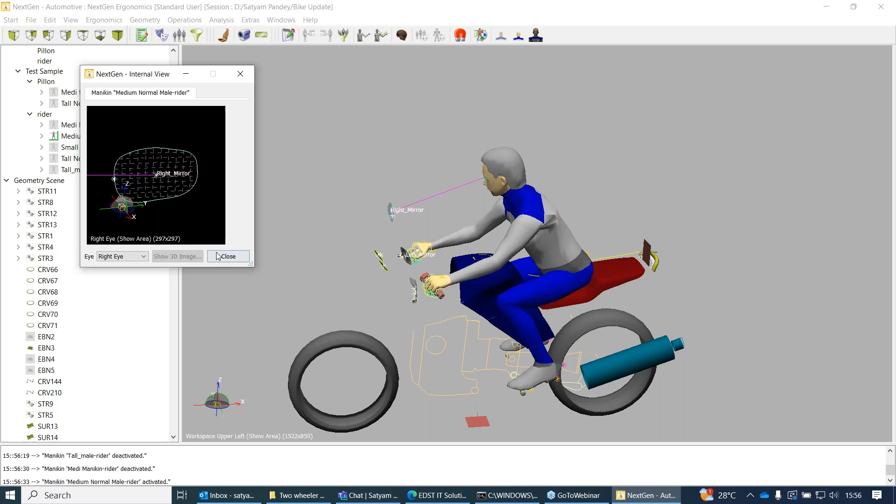I think we have some time constraints, but nonetheless we have completed this demonstration. So now we'll move to the Q&A session.